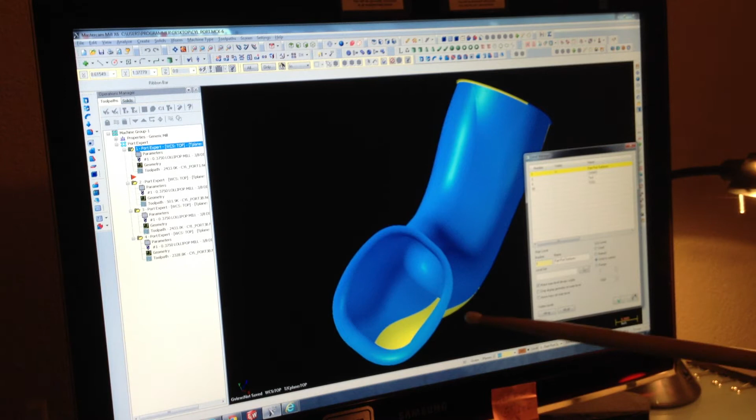Right now, the only thing you see here is the body, all surfaces that create that cylinder port. As we looked at last time, if I rotate here, you're going to see that giant bump right inside of there. And if you look at it from bottom, you can see right there is a dent. That makes it a little more complicated, but we're going to machine it.

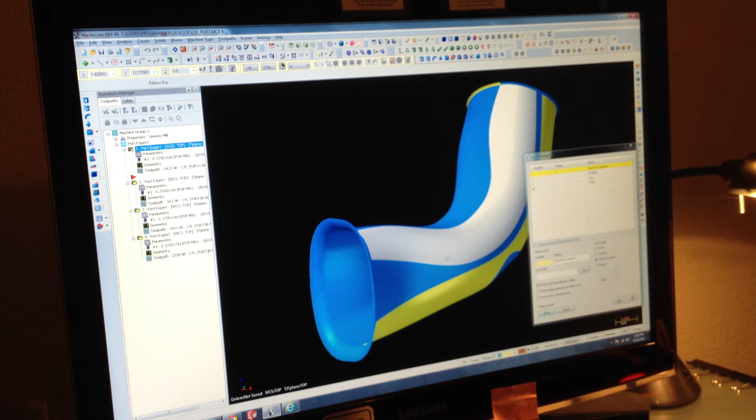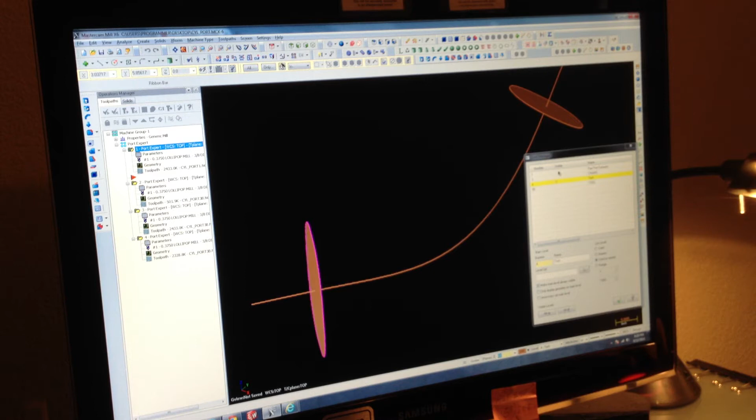So now we're going to go back to the surfaces. I'm going to show you how we machine this part. We don't need the level right now, so I'll turn it off. Let's shrink it down a little bit.

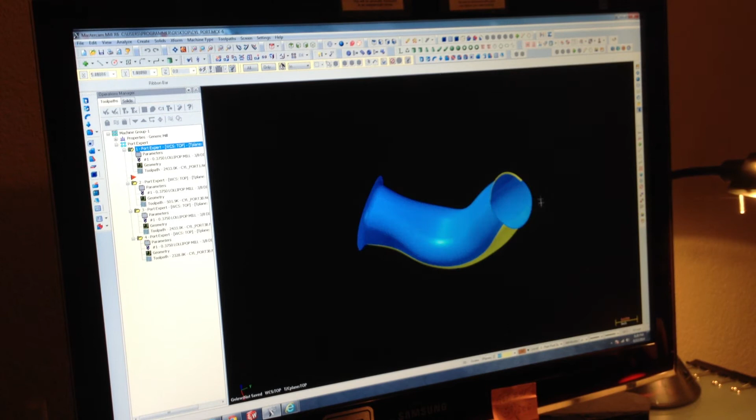You can always use a space mouse, but when I didn't have one, every time I had to do rotation with the regular mouse, it's click click, doesn't have a smooth rotation. So what I usually do is go Alt and up and down for smooth transitions, or left and right that we can control. If I use the mouse, see, it's jumping. It's sometimes okay, but when you want to do small, very precise rotations, just use Alt and the up, down, right, or left arrow.

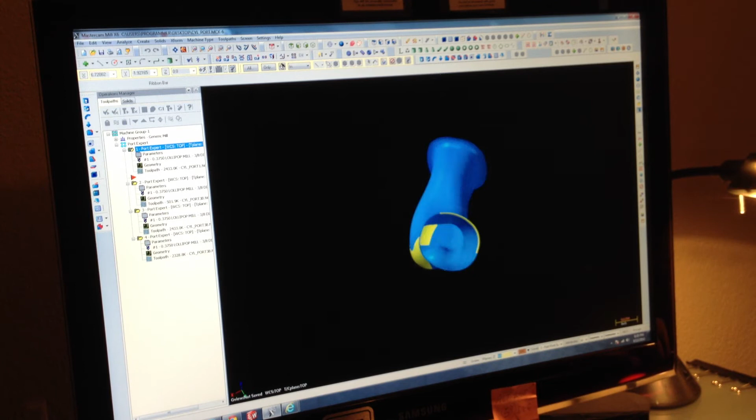In this situation, we're just going to adjust it to how we're going to machine it. You can use the little mouse right here too, and then I'm going to hit the isometric view. See, it is, page it down.

Okay, so now we're going to start right now. As I mentioned, this program is already done, and I'm just going to go through it with you and tell you exactly what we've done so far.

There's going to be only two operations here: rough the port, and finish the port. The only difference between roughing and finishing, since we're going to copy the rough port down and rename it for finish, is we take the rough amount off the walls. If you leave 30 thousandths, 20 thousandths, whatever it is, you remove that, make it zero, and that makes it the finish. That's the only thing—you're not doing anything else.

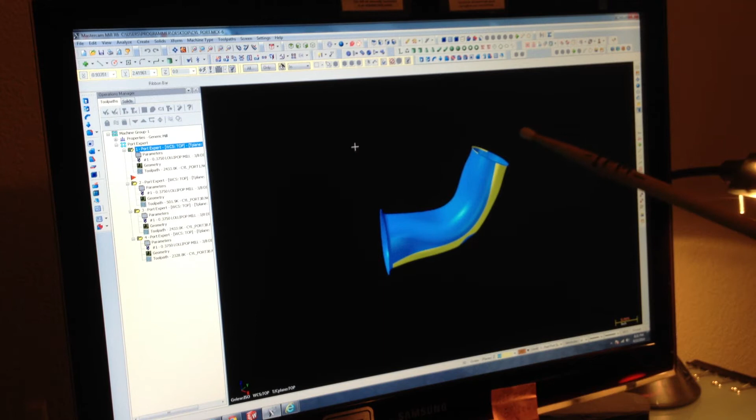So let's start with the roughing. We're going to be roughing from both sides, from here all the way down the middle, and also from the end part coming this way. It's a 5-axis machine—you can rotate anywhere you want, as long as your fixture is good and clears both ends.

And when you're using both sides, Mastercam will give you overlap automatically for smooth transition. As long as you don't use two different tools, but one tool on both sides, your surface is going to be very smooth—you won't see any deviation at all. Okay, so on the rough parameters...

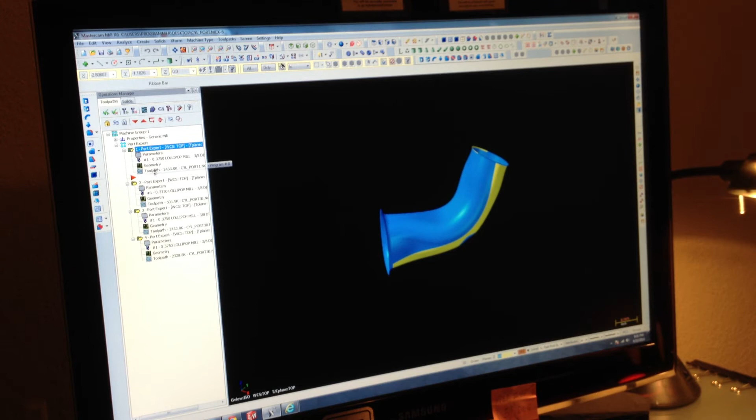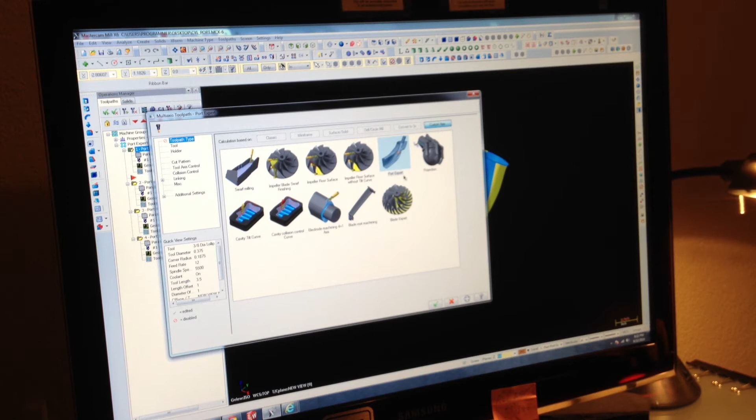So we have a toolpath type. Mastercam has many options—Classic was the oldest one we used for many years, but right now you're going to use a custom app, and you're going to use Port Expert, right? And then for the tool, you're going to use a lollipop, already created it. If I open it up, you're going to see it. And then cut pattern—we don't have any solids here, so everything is surfaces.

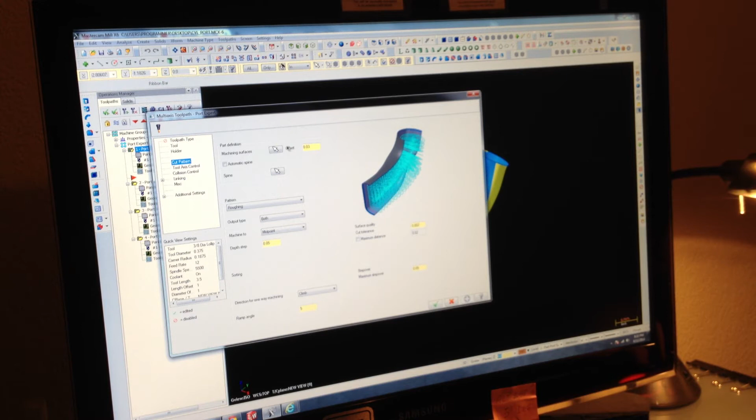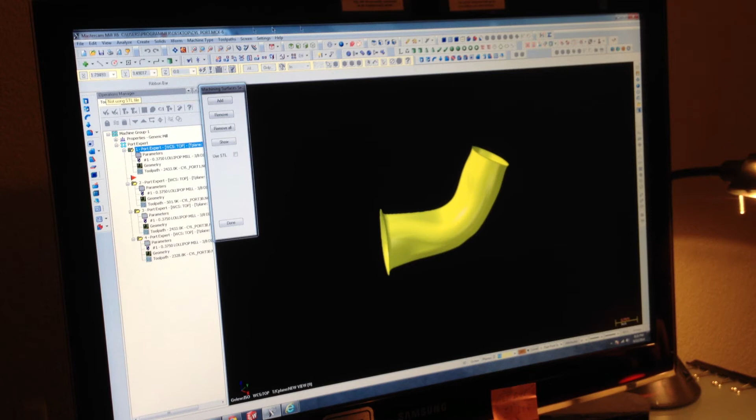So all you have to do for part definition, you go to this right arrow and click on that, and then what I usually use is QM colors. As long as you have QM colors, all you have to do is choose your color, and it picks it up all for you. In this situation, it's a little bit different, and I'm going to show you right now.

Okay, so if I go clear colors—I want to close this done. So if I move this around, all the surfaces that we need right now already have blue outlines. When you shade them, you're not going to be able to see it.

But right now it's not shaded, so when you want to choose this machining surface, you hit that, you pick up the arrow, you go to QM colors, right? Once that's like a quick mask, you choose the color blue, and Mastercam automatically picks up all the surfaces for you automatically. In this situation, we already have it.

The only thing different here is we added a 30 thousandths offset, rough for finish tool. And then for your spline, you just click on this, okay?

I don't want to do it right now, but you go chain. When you go to chain, you go single chain, and then you close this. All you have to do is pick up the spline. The spline is not showing right now, but you go right here.

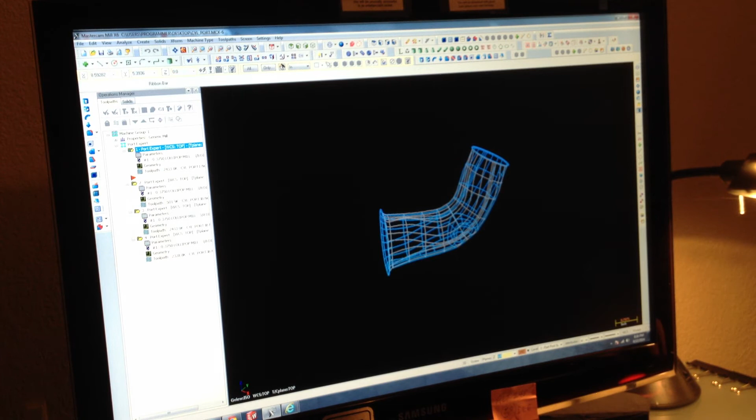There's your spline. When you're picking up the spline, make sure you don't pick up the vectors. If you use automatic, Mastercam is going to add both vectors to your spline, and it's going to waste a lot of time because it's going to do helix all the way from up to down. So the idea is, when you're doing a chain, just call it single, and then pick up that spline right now that I'm highlighting. Just single and click right here, and it picks up the whole spline for you. By doing that, you already created that.

I'm going to open it back up again. So by creating a spline, you hit the arrow and you choose that spline one more time, and you're done. Then for pattern, it's rough and finish. You pick up rough right now. You got to rough it first.

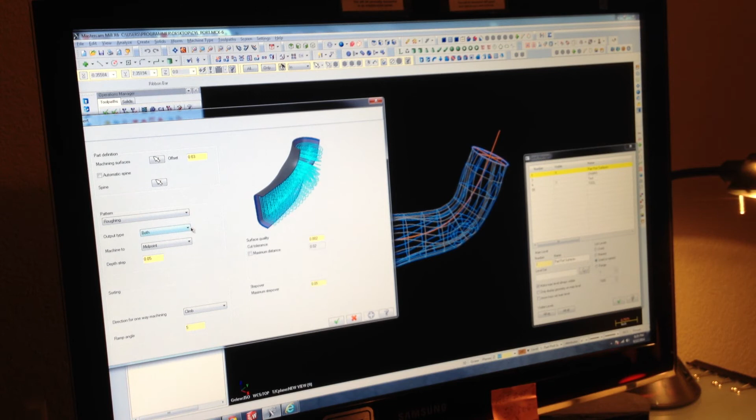And then here, the output type, that's very important. Both side, top - you can see this is top. And then if you go bottom, it's bottom. In this situation, we're going to pick up both, we're going to do it from both sides. That's the best way you can do it. As Mastercam does it, it's going to overlap when it comes from top and bottom, overlaps a little bit so it looks smooth.

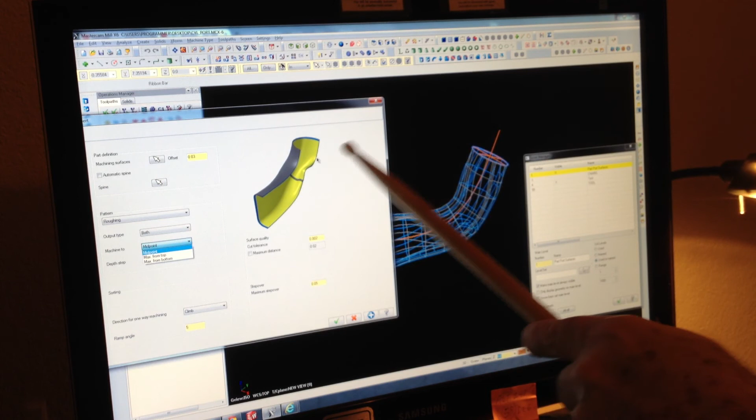Machine to midpoint - there's many ways to do it. Max from top, max from bottom, but midpoint is the best one because, as you see that little overlap right there, Mastercam does that for you automatically. It gets all smooth. So you come from this way once, and you come back from this way once, and you rough it all out, as long as your fixture clears everything.

And then depth cut, at this time it's going to be doing helix all the way down. We pick up 50 thousandths, step over 50 thousandths here, and then 2 thousandths cut tolerance for rough is good.

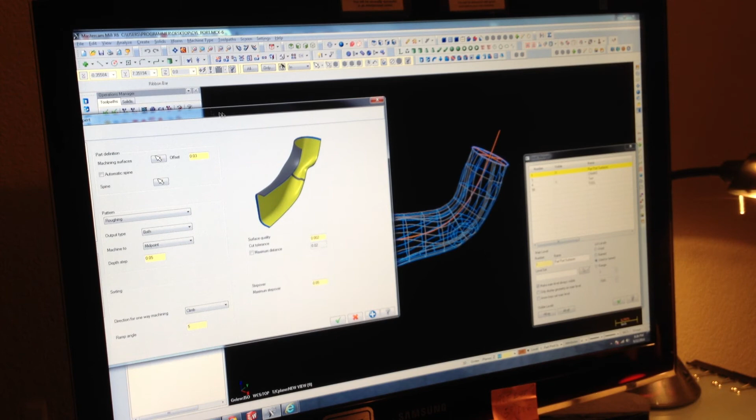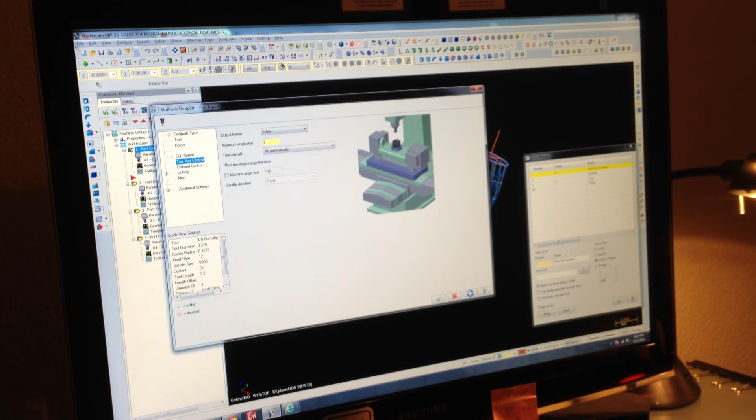Tool axis control, everything's set already. We've got TR attachments here, like TR 210 or any other TRs. TR stands for table, and for rotations in 5 axis. So it's done, maximum angle 3 is good for this situation. This is very important, what I'm doing right here. You want to pay attention to the next one.

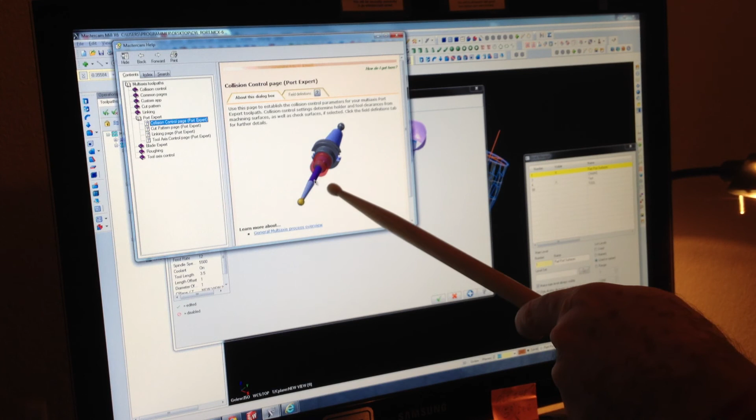So if I open up the help, you're going to be seeing something here, I'm going to show you right now. That's very important for you to understand. So there's your lollipop tool, right there, and there's your holder. There's a tapered angle, there's a straight angle, and then there's a holder tip - they all have names for each other. So what we want to do, we need to add 20 thousandths to every one of this: from the tip to top of that curve is one, then from the flat all the way to bottom of the holder is another one, and holder tip is another one.

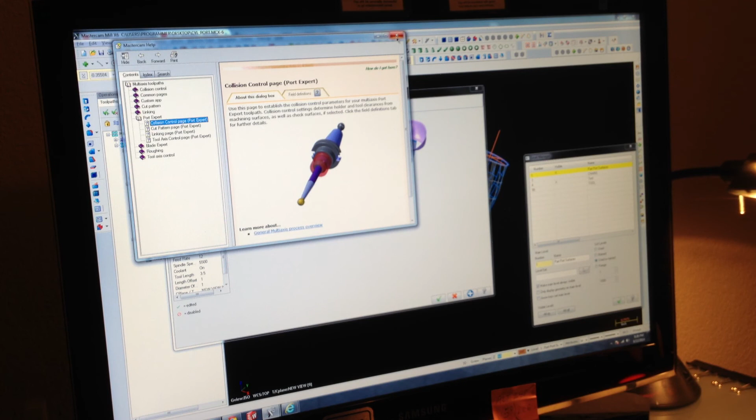So what we want to do is create a shield, 20 thousandths. That way, if your tool is going to violate the program or the machine surfaces, it will alarm out and stop. It will save you a day. So if I close this again, as you can see: holder clearance 20 thousandths, arbor clearance 20 thousandths, and shaft clearance 20 thousandths.

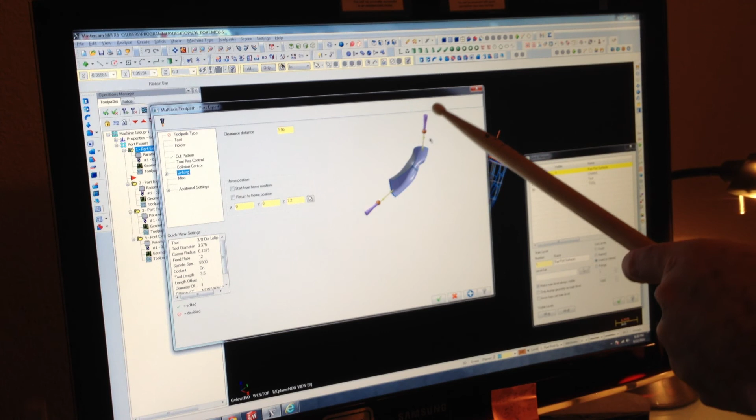And then you go check against machine surfaces - you need to check that all the time. Linking pattern, you can't do much. Already set at 950 inch, so it's going to start from this slip, 950 thousandths above, and it's going to wrap it down doing helix cuts with a little overlap. Then it does the same thing here, 950 thousandths away from this surface, jumps down about 100 thousandths above and starts doing a helix over there.

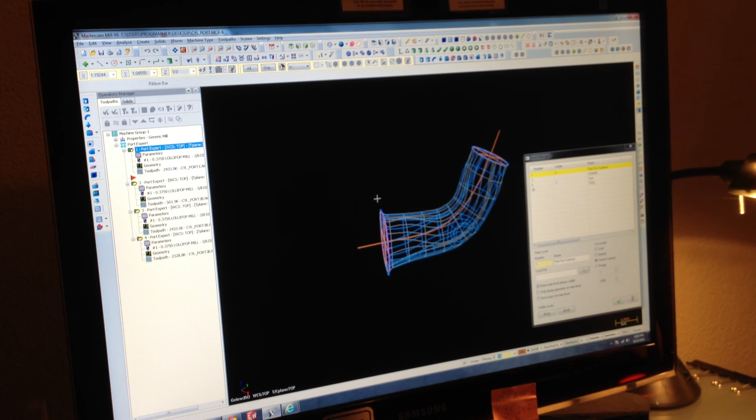So this is a rough one, and I think you have to come back for finish later. It only takes about 10 minutes right now. So what I'm going to do is shade it, and run the toolpath on it. I'm going to slow it down.

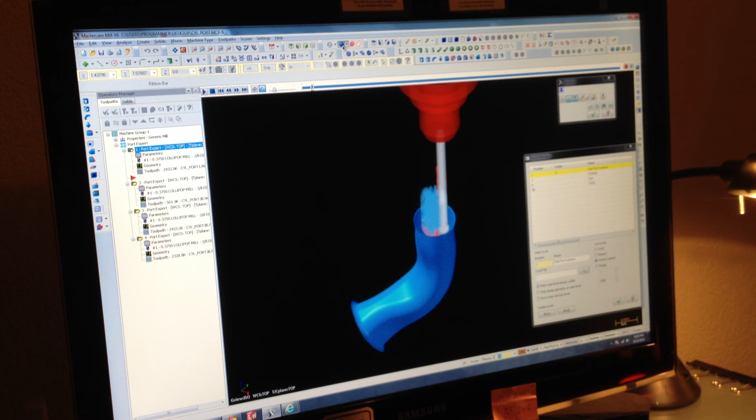And hit start. As you can see right there, I'm going to turn off the shading - there it goes. If I turn off the shading, you're going to see exactly what's going on. So we're going to speed up a little bit. It's going to go all the way down, past the halfway point by the amount Mastercam puts in there for you.

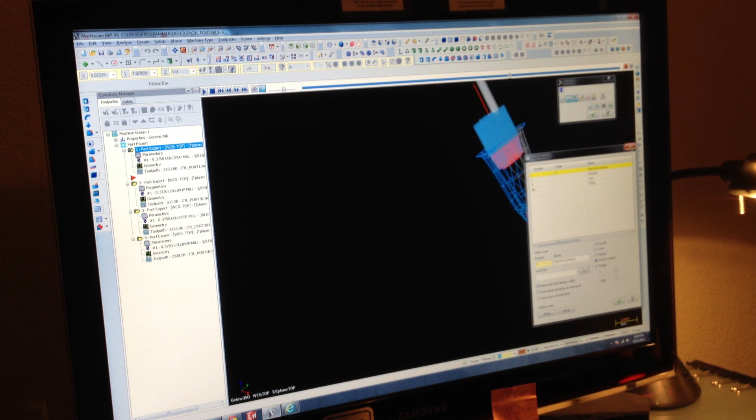This is 5-axis, that's why it's doing that. Now it's doing the other end, roughing the other end. And then if I turn the shading back on, see there - let's look at the overlap. There's overlap right there. So the roughing is done.

And we're going to close this video. We're going to have to upload that. I'm going to come back in session 3 to do the finish toolpath.